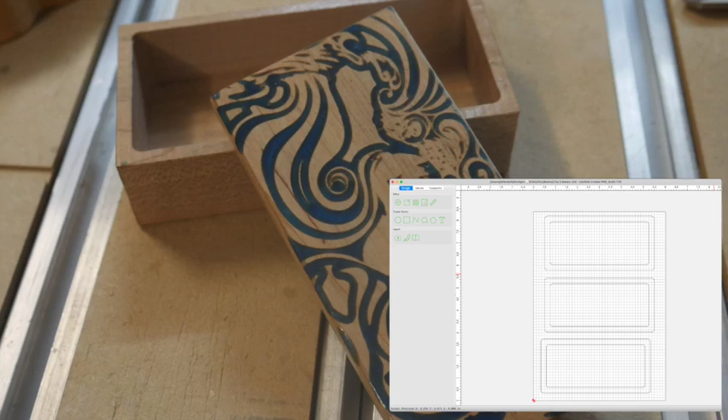This time I'm going to let you in on a little secret: boxes are made out of just 2 lines. So what am I talking about? Think about it this way. Boxes have an inside and outside. The bottom of the box is basically like a cup with an inside and an outside.

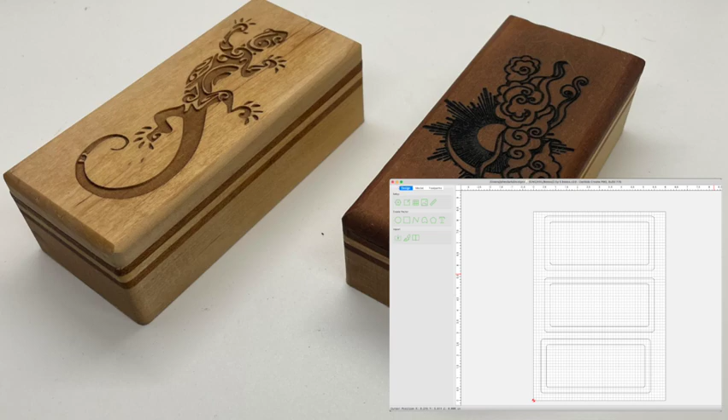The lid needs to fit the box. Since we don't want the lid to just lay there, we need a lip for the box that follows the inside of the bottom. This means that the lid has its own inside and outside, one that matches the bottom of the box. Let's take a look at some examples.

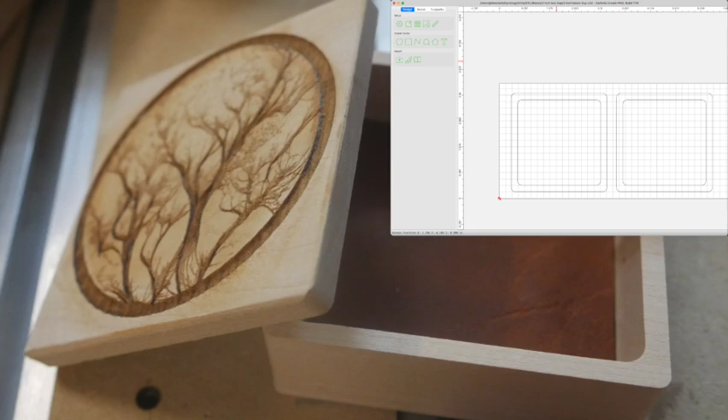If we look at boxes with that in mind, we have a square box here that has an outside wall and an inside wall. 1 line, 2 lines. And the lid matches, right? There's an outside and an inside. And those are literally the same line.

So it doesn't matter if the box is rectangular, still the same thing: outside, inside, outside, inside. Circular, same thing: outside, inside, outside, inside.

Even if you get into something a little crazy, like say a box shaped like a sugar skull, you can do the same thing: outside, inside, outside, inside. That lip matches the box and it fits down like that.

So what does this mean for us in Carbide Create? Well, let's take a look at your new best friend, the Offset Vectors tool. At its most basic, we can start with pretty much any shape we want. For simplicity, let's just do a square for right now.

Once we have this as the outer edge of our box, we need to decide how thick we want the walls to be. I'm going to use the Offset Vectors tool to create a wall that is 0.2 inches across, and I'm going to tell it to do that to the inside. And now we've got our inner and our outer.

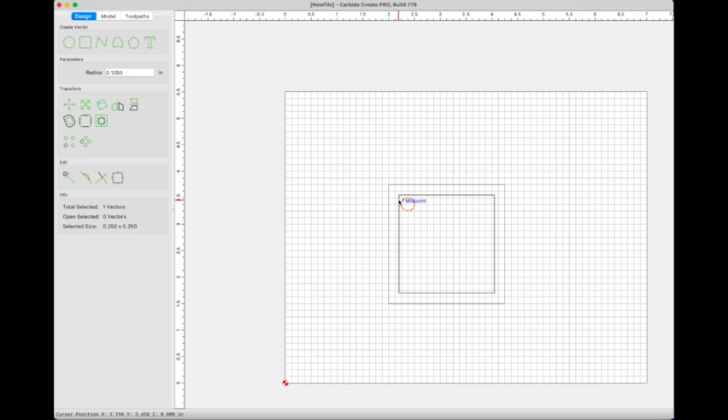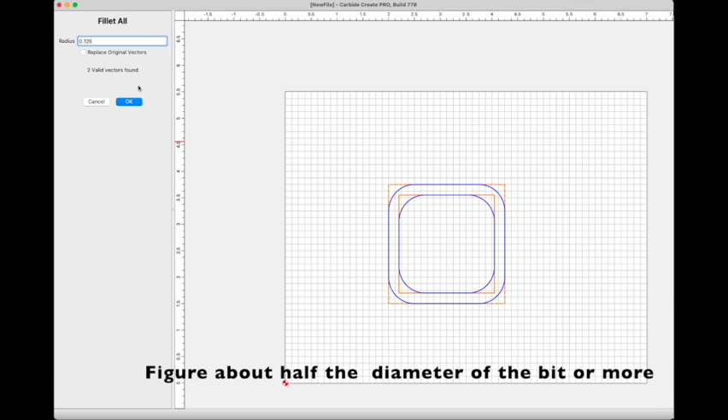We don't want that. So in order to fix this, I'm going to select everybody and come over here to the Fillet All tool. I'm going to tell it I want just enough space for these things to get that 1/4 inch bit in there, and that will leave me with these little rounded areas, and that's what I want. I'm going to replace my original vectors. And now we have basically the pattern for our box.

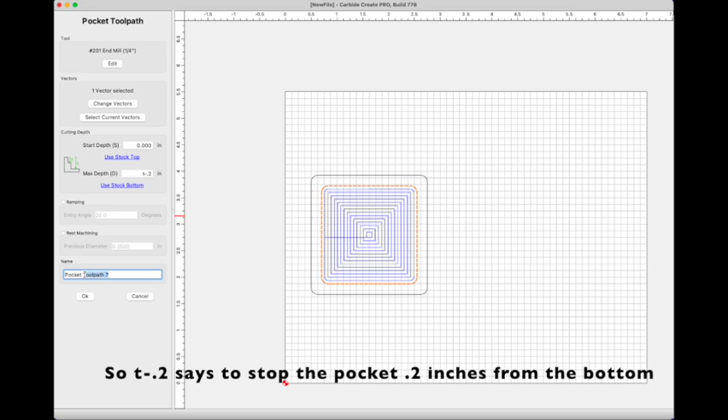The way this works is that for the initial box, we come in and we do 2 separate tool paths. We do a pocket here, and we go down to the stock bottom, and the way I'm going to do this is I'm going to tell it to do T minus 0.2. What that's going to do is leave 0.2 inches from the bottom of the box. So if I come in here and I do my pocket, and I show my simulation, this stops at 0.2 inches, so that'll be 0.2 inches thick.

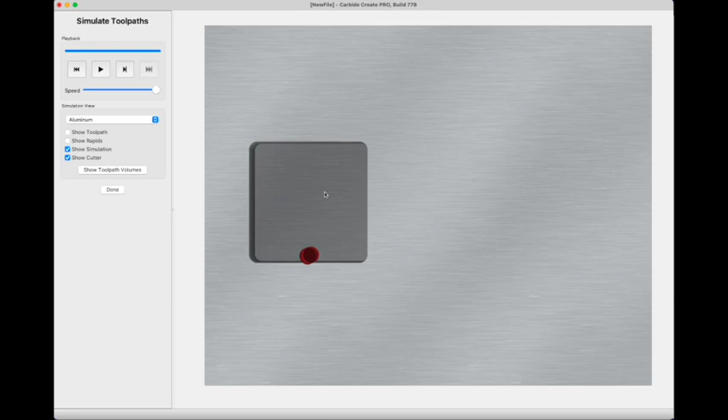If I come back into my design later on and I change my thickness to 1 inch, all the tool paths update, and I still get the same amount taken off. I still end up with 0.2 inches of thickness at the bottom of my box. This is a really great way to set these things up because you never know when you're going to change stock and have slight variations in the thickness, and it will leave you a consistent wall there.

So for the outer portion of our box, I'm going to do something similar. I'm going to do a contour toolpath with a 1/4 inch bit, go around the outside, and set this max depth to T.

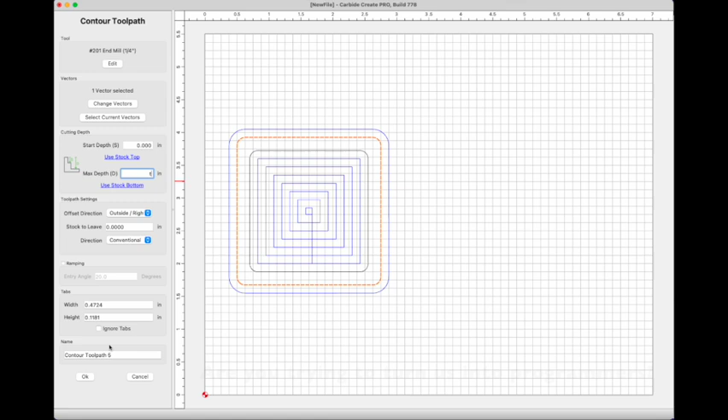That's going to set it to the very bottom of where that box, where our stock is. I'm going to call this cutout and tell it OK. If we look now at our simulation, we see it's gone down to the bottom and we have the bottom of our box.

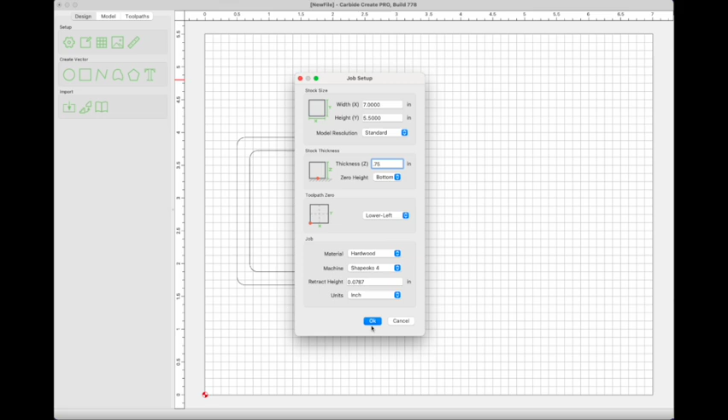Like the rest of this, it doesn't matter how I set this. I can come back in and change my stock later to where, say it's only a 3/4 box - so 0.75, I've got thinner stock. If I tell it OK, come back to my tool paths, show my simulation, it's still the same thing. I still am going to have 0.2 of an inch down here at the bottom, and it's going to cut out accurately to this piece.

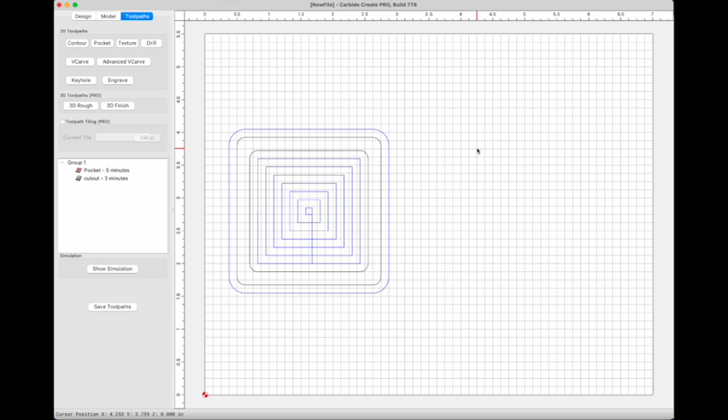So now that I've got that, let's take it and do the top, right? I'm going to go ahead and call this bottom. So I'm going to come in, I'm going to create a new tool path. I'm going to call this one top.

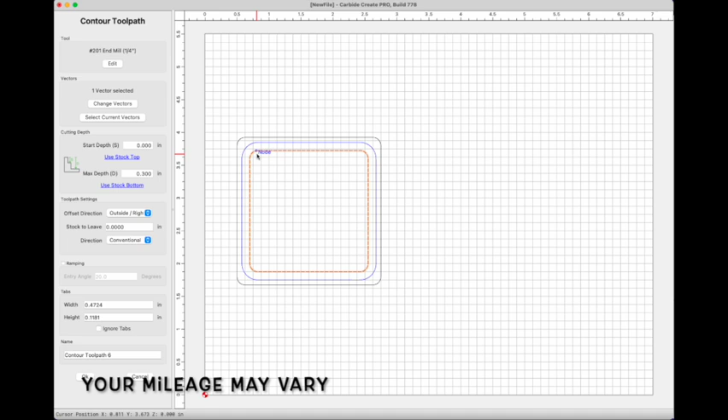We can do the same kind of thing. Now in this case, instead of cutting a pocket in this, I'm going to cut around the outer edge. So I'm going to do a contour, going around the outside. In this case, I always want my lip to be about 0.15 inches deep around here, so this will stick up about 0.15 inches.

So in this case, I'm not going to use the T variable. I'm just going to tell it 0.15. And I'm going to call this lip.

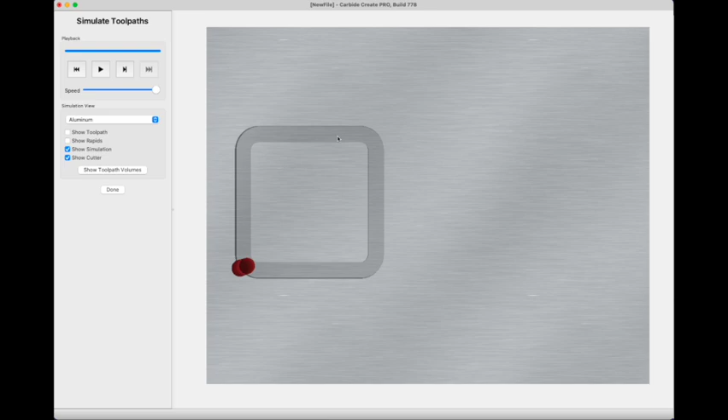If we look at our simulation, that leaves us this inside piece. And then on this one, I'm going to go ahead and do a contour outside, and I'm going to set this to the bottom. So again, T - that's all I'm going to use.

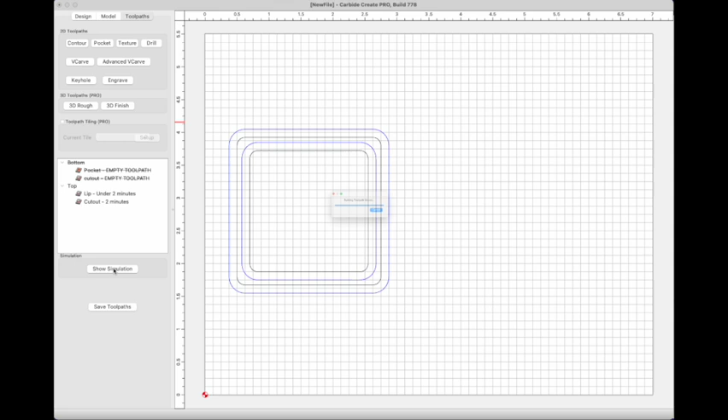So now, if I'm going ahead and making my top out of, let's say, 1/2 inch, I can come back to my design and set this to 1/2 inch. Then I go back to my tool paths, show my simulation, and you notice I've got the lid exactly how I want it. This piece is raised up about 0.15 inches.

And then the rest of the lid is cut out as usual. You'll get some little tips here on the edge - you can snap those off pretty easily.

One thing you can also do on this kind of selection is sometimes you'll find that cutting the bottom and the top in the exact way, so that lip is the exact size of the pocket, is a little too tight. You can actually come in and adjust that.

What I typically do is go back to my design and select this piece and do the offset vectors again, but set this to 0.004 inches. You can play with this adjustment however you like, but this essentially is going to create 0.004 of an inch difference. You can see it's really, really close, and if I zoom in, you'll see it's very, very close like this.

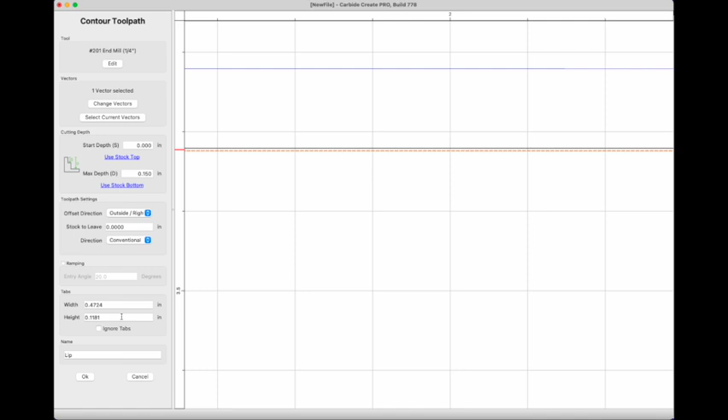So I can now make that the lip for the top. I go back in, select my lip, and tell it change vectors, use the current selection, which is going to be the one we have there. This will make that lip slightly smaller, so that this piece is slightly smaller and will fit more easily into our box.

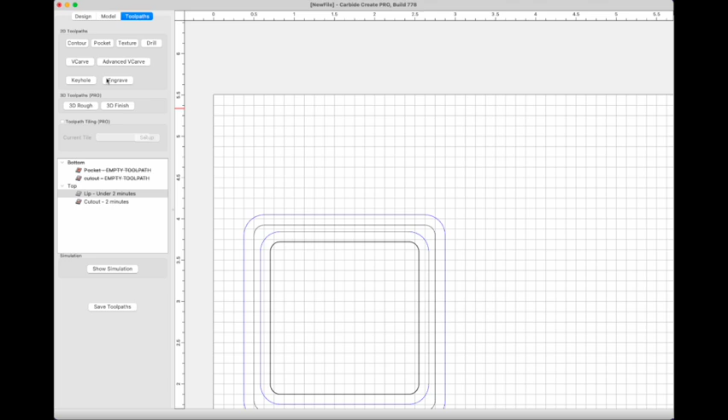Now that's the basics of this idea of just two lines, but this works with pretty much any kind of box. So if I go back to my design, I'm going to get rid of this completely.

If I do a circle, it's the same kind of thing. Come in, set this 0.2 - that's how wide my walls are going to be. Now I've got this, and I've got the same thing - an inside and an outside.

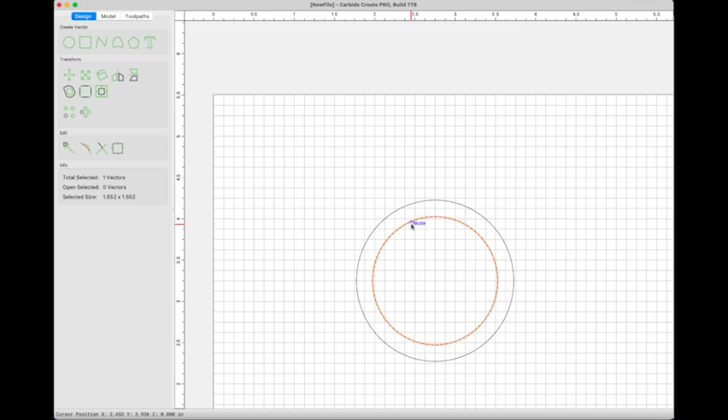Come back to my tool paths. I can set the pocket to this one. I change that one to this.

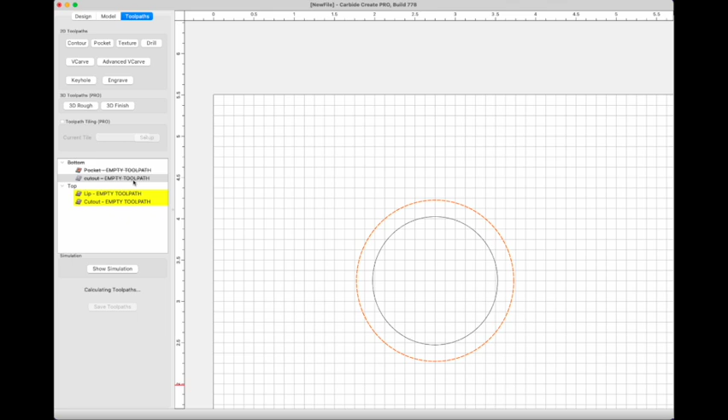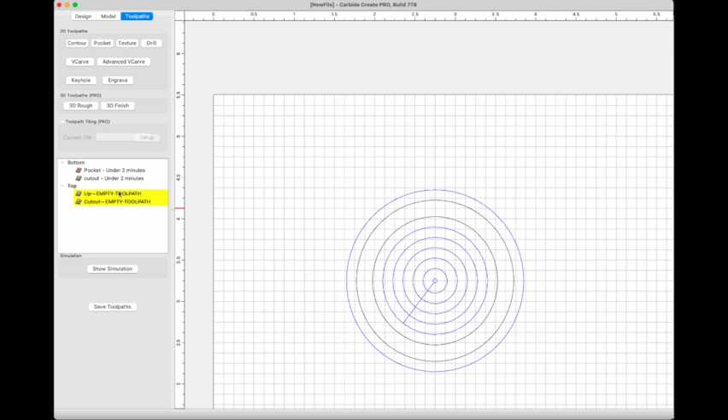All right, so those are like this. And again, I get my box the way I expect. Done. All right, if I disable this, enable this one, now I come to my lip.

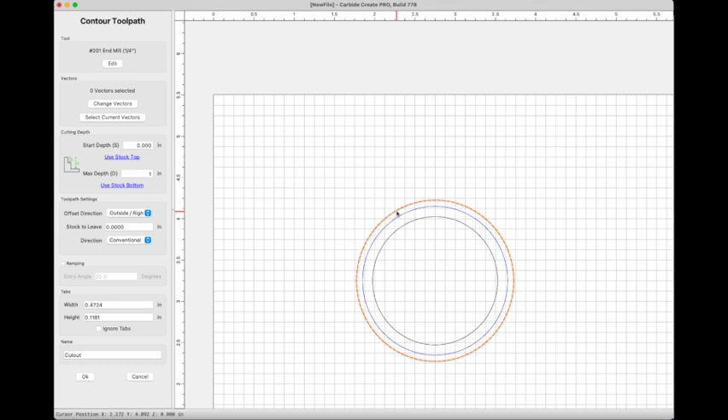Tell it to change the vectors, use the current selection. Same with this one - change the vectors, use the current selection. Cool, now I've got that, and if I show my simulation, I get my top.

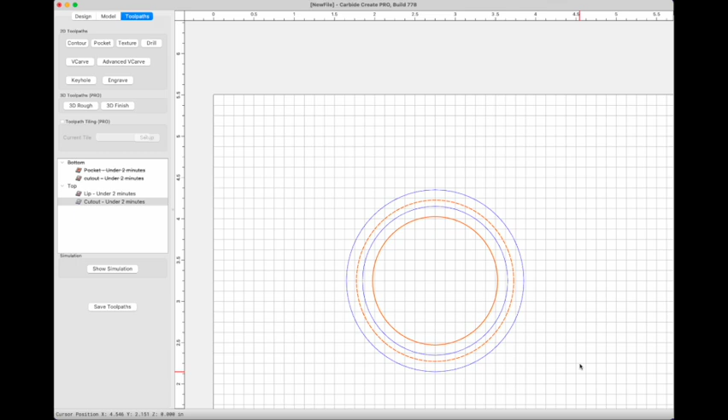This little piece here fits right down into this hole that I needed. Now this works too for complicated designs. Let's say I go back to my design.

I'm going to get rid of this, and I'm going to come in and open up one of the elements library. I'm going to do this guy. All right, let's take him. I'm going to group him for right now and make him about 5 inches high. Okay, now I can zoom in on him, right?

And if I want to make a box out of him, let's say I'm going to just V-carve this guy, this piece in here, but I want to make this the edge of my box. Come in, break these apart, and I'm going to select this outer piece here.

Now the first thing I want to do is I notice that I've got these little sharp corners in here and in here, and I know that my 1/4 inch bit won't get in there. So before I do any of this, I'm going to come back to my Fillet All tool - yeah, I know it's not fillet, give me a break - and I'm going to set this to 0.126.

Okay, so now I've got little areas that I know my 1/4 inch bit will get into. So now I have this set - this will be the outside of my box. And then I can come in and choose this and inside, and now I've got the inside of my box.

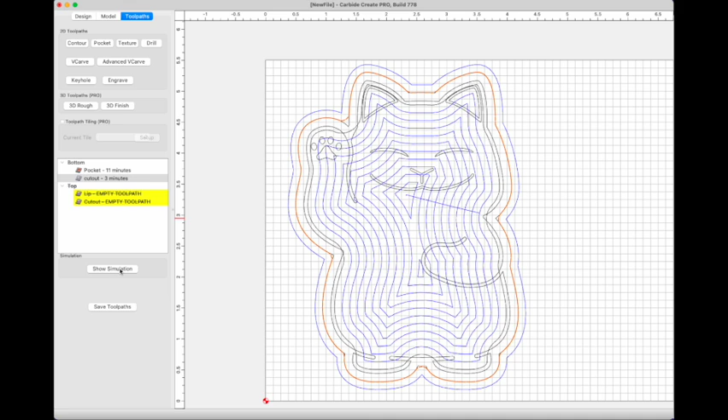Now if I look at my simulation, I've got my box.

Now when you have a design like this, where the box is going to be asymmetrical, the thing you have to be really careful about when you do your lid is you're going to have to flip this design. So I tend to save this as a new file and go ahead and do that, but I'm just going to do it in this file for right now just to keep things simple.

I'll go ahead and delete this. So let's assume this is the top that we're working on now. I want to take this entire design, grab it, go into my design, and I'm going to mirror it like that. That way, when we flip our lid over, the box will fit correctly.

So now that I've got that, the tool paths are exactly the same as how we had them before, right? So this is going to be our lip going around, and we'll do a contour, 1/4 inch bit. We're going to leave that 0.15. We're going to go outside right, call it lip.

Alright, then we're going to come around to our other design here, this one, and that's going to be our outside contour. Current selection, and we're going to do T for that one because that's going to be our stock thickness. Outside right, and call it cutout.

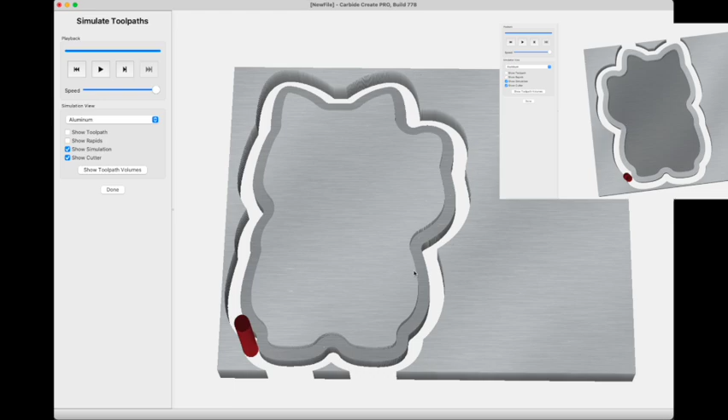Again, you can do the same kind of thing if you want a looser fit. Go ahead and bring this in 4/1000ths of an inch if you want for a slightly looser fit, and then come back in, and whatever you want to do on the top of your box you can then do.

So if you try this technique, you'll be able to create boxes of any size and shape that you want. And it'll give you a little bit more time to do things on the top of the box that make it more visually interesting - get as artistic as you like. Hopefully this will help you, and I will see you again next time. Thanks.